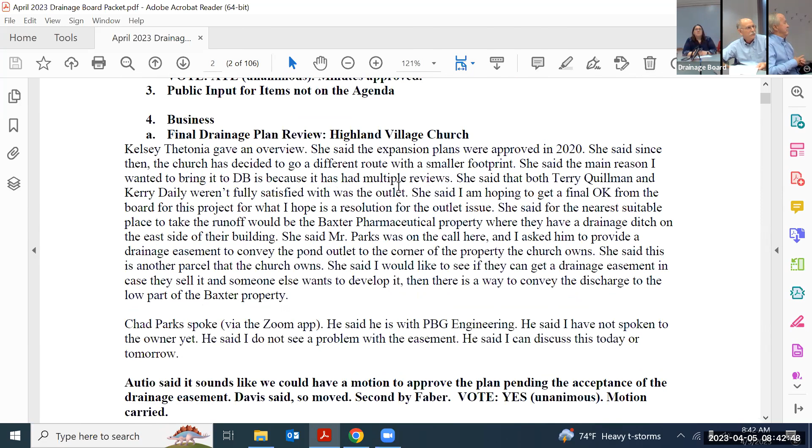Kerry Daily. The one I wasn't fully satisfied with was the outlet, okay, with the outlet maybe. Yep. It's a minor, very, very minor, but I read it a couple times to try. I was just curious if Donna, Ms. Barbara could hear us. If she wants, she could put a reaction of a thumbs up or something on there.

Don, did you catch those? Yes, I am here. Can you hear me? Okay. You came off mute, but we can't hear you. So if you can hear us, you might have your speaker set up, or nothing on our end if we can't hear. I can hear you, Donna. Okay, well, would you mind trying to speak to see if we have our speaker set up? I think the Drainage Board has their speakers on. No, we can't hear you.

They can hear us. So under the Zoom settings, you want to change it. Yeah. Nothing. Got it. Okay, Donna, you're still off of mute. Can we hear you? Yes, I have been able to hear you, but I guess you couldn't hear me. Can you hear me now? Oh, alright. I changed our speakers if someone wants to try talking, see if we can hear you. Maybe just one more time under the mute. There's a bunch of Zoom chats coming in, so you might wanna check for chats. There's two different settings. Okay, so everyone can hear her, but we can't hear her.

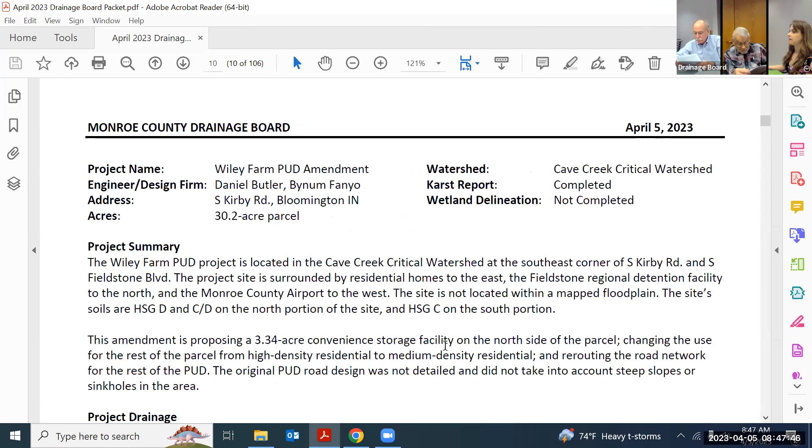All righty, move on to the first order of business, the Wiley Farm PUD. You want to take that over? Yeah, so it's the Wiley Farm PUD project. It's within the Fieldstone area. We have Dan Butler on Zoom representing the project. So this is an existing PUD. As it stands right now, they have the ability to develop this property as high density residential. It's located just south of Fieldstone Boulevard, and a portion of the site drains downstream of the Fieldstone Regional Pond. And the eastern portion would drain through the Fieldstone PUD, Summerfield PUD behind the dam.

So drainage is going to be a big topic for this development. They are coming to us to propose a few different things. The first thing is wanting to reroute the road network through the PUD because the original design was pretty crude. It didn't really take into account the steep slopes, sinkholes, and other environmental factors on the site. So they're going in and trying to design it how it should be to avoid more sensitive areas, calling out non-buildable areas with steep slopes. They performed a karst study and delineated sinkholes on site. So we have all of that outlined now, so they're proposing to redo the road network.

The main thing I'm bringing to you today is what is going to the Plan Commission. They are proposing changing some of the uses on the site. So instead of all high density residential, they want a small portion, about 3.5 acres, to go into commercial for development of self-storage units.

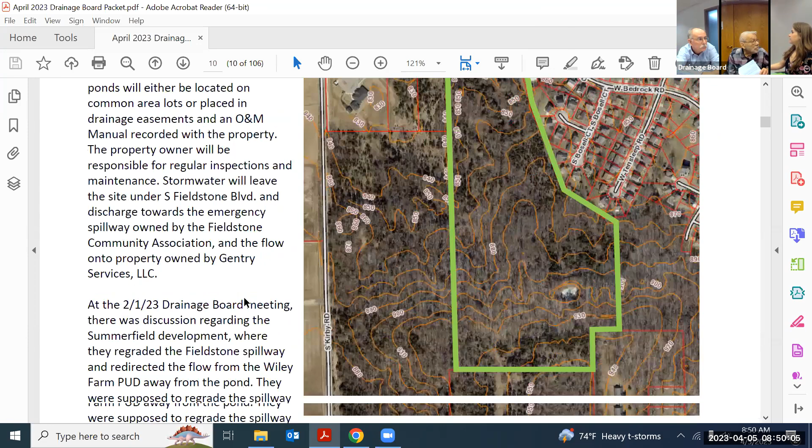So about 65% for the storage units. Let's scroll down to this. And then 40% for the remainder of the site, including the roads, which that 40% is in line with the numbers that Bloomington has for their medium density development. From what I could do on online research, that's pretty standard.

But we have specific concerns about this area, of course, because it is in the Cave Creek watershed. So today, I want to talk about what development of the site is going to look like, what the drainage design requirements are going to be, any concerns we have, and I have a whole list of things.

At this point, do you have any general questions for me, or do you want to hear from Daniel? I would just like to provide some information that since we weren't able to meet due to lack of quorum last month, this continued to move through its process, so it has already gone to a preliminary hearing at the plan commission. So there are some other discussions, but I was pretty outspoken about making sure it came back here to the drainage board, so just wanted to make sure that that was mentioned.

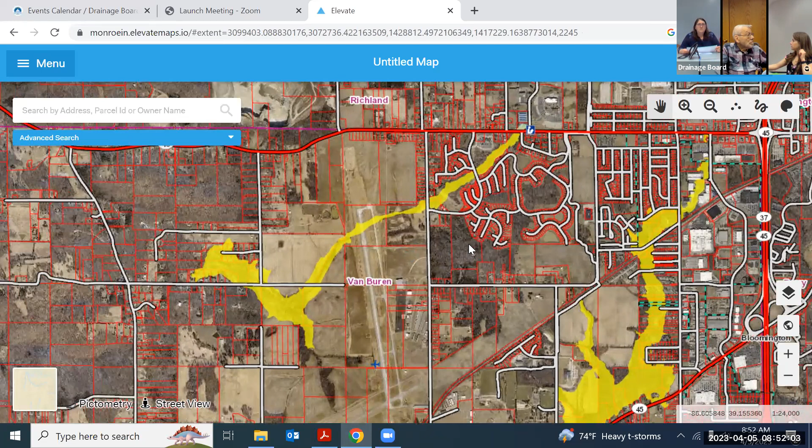It's all wooded right now. Part of it used to be farmland back in the day. So it's grown in. The sinkhole area is mostly to the south here. The drainage goes basically from south to north, so it's draining in this direction. This drains over through here. So that should just give you some more context. And then, of course, the Fieldstone facility is up here.

Leaving it wooded would absorb most of the water. I haven't walked the site to see the quality of vegetation, but it's not very good. I am looking at a requirement to replant trees, anything that they have to remove to put in the detention ponds. I've asked for this before, a 1-to-1 replanting ratio. I'm suggesting 2-to-1 for this one.

No Bradford pears. It would have to follow the planning department's landscaping ordinance for species requirements. There would be room to do that mitigation. We'll find out, and they can be around the ponds, common areas, things like that.

Previously, they were able to fit it in pretty tight there, around the ponds. Yeah, if I could say that, the storage units look like they're not going to impact the karst on site. But downstream, there still would be significant addition to the subsurface flow rate because this is a sinking stream.

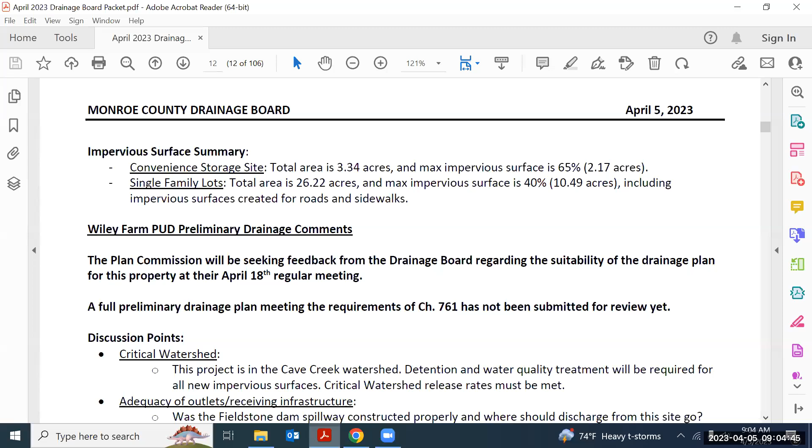We're recommending that with the following conditions: the petitioner is to designate common areas for all drainage easements when the property is subdivided, proposing minimum design standards for each area including minimum lot width and minimum buildable area, and the petitioner is to designate conservation easements around the sinkholes to the south and non-buildable areas.

We are recommending a negative recommendation for adding one use to tract F to the plan commission, based on the petition's incompatibility with the Monroe County Comprehensive Plan. That recommendation for the road configuration and removing part of the buffer yard also has conditions.

The petitioner is to propose an alternative connection to Bedrock that better avoids sinkhole conservancy areas, and to revise the proposed impervious coverage percentage to discount for the roads in the residential areas. Number 3 is subject to drainage board comments. The petitioner is also to propose language regarding the timing and extent of the road network build out in coordination with the timing of the proposed future residential development, and to amend the roadway design to require cul-de-sacs instead of stubs at the end of the roads.

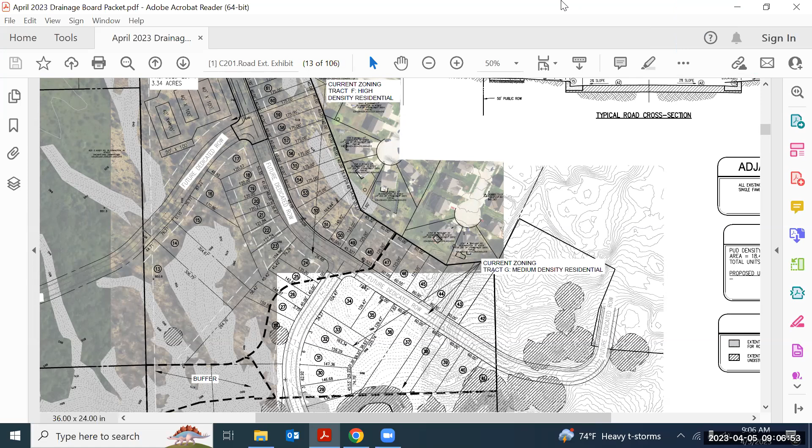Daniel, you said discounting the impervious surface of the roads, or are they accounting for it? Petitioner is to revise the proposed impervious covered percentage to discount the road for the residential areas. So we want them to recalculate it so you already know how much impervious surface the road is going to take up, per lot or for the lots. Just subtracting out the roads, so we see what that number's going to be. Just wanted to make sure we account for it, that's what we're looking for. Right, just wanting more clarity.

Is this supposed to be low income housing? I'm not sure. I don't think that exists. It's not ours. No, all right.

Planning, I didn't see on the plan the plans for stormwater drainage to the pond. Is that going to be along all the roads? Oh, you mean the storm sewer system? Yeah, we haven't received the full plan yet, so we're just talking about whether or not this is going to be feasible and what we want to see with that drainage plan. It's more diagrammatic right now, because they just got - there will be ponds, that's what we have right now.

Daniel Butler, would you like to respond to any of the discussion so far? TSD, could you please unmute Daniel - he's on the attendee side with his hand raised.

I think I might have misspoke earlier when I was talking about impervious and pervious surface regarding Daniel Butler's calculations of how they would increase or decrease - about changing the conditional use and the lot sizes for the residents. So I'm pretty sure I misspoke earlier. I don't think that's a problem right now, to me.

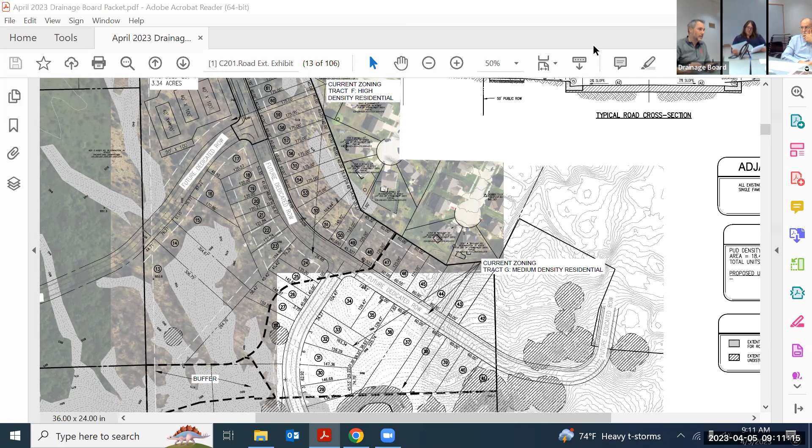But yeah, as I was saying, and your phone, you picked it up - I think I misspoke earlier when I was talking about the impact of the pervious and impervious surface, so when Daniel gets to speak he can clarify that. I've been trying to look for his analysis of the impact but can't find it in the planning packet. I think it might have been in our tables. Maybe I'm thinking of the wrong one. No, you might be right, I'll look at last month's.

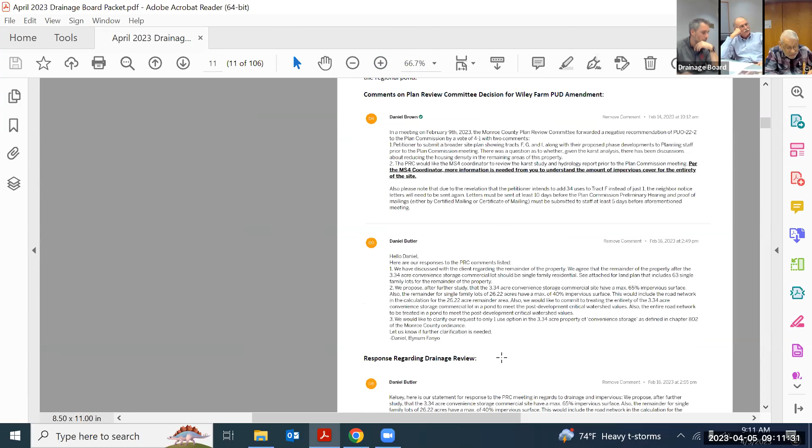All right, this is Daniel Butler here. Hi Daniel, good morning. Yes, this project we had proposed in phases, and we are committing to, as kind of a package for the site, putting together a little piece of commercial at the front end, 3.3 acres of self-storage, and then the remainder of the site we are committing to putting the restriction on us for future phases of doing medium density residential, more or less, with a 40% impervious rate. So we're going to be lowering, committing to lowering impervious for the entirety of the site. We agree that this is a sensitive area that needs to be lowered impervious. On top of that, we're going to be doing multiple pond locations. Even to start, we're going to be doing 2 ponds at the north to meet critical watershed rates, one for the road network and one for the new commercial site. At this time, no residential is proposed with the first phase at least, but feel free to ask any other questions that you would need.

You know, I think it's great you're putting in the additional ponds. This is Bob Audio. And will you be doing any monitoring of the ponds to verify that it is at the rates? Because if it discharges too quickly, then you might be exceeding the rates, even though they're designed properly, just given the karst nature of this area. Well, that and our 4-inch orifice.

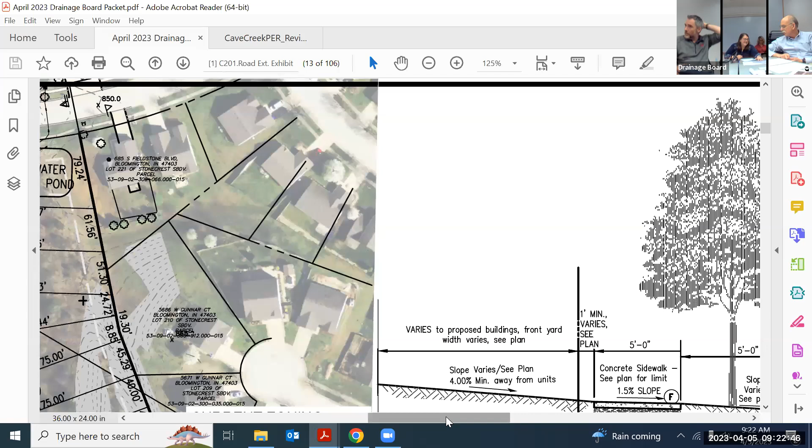But I mean, that's a great question. Yeah, this road dead ends, for the potential to develop this. Good question. And this is draining, I think, it's hard to see the contours, hard to tell, but I think the adjacent parcels. Daniel Butler, the question is if the two proposed ponds are gonna be designed for the additional development, right? On just this parcel. Yeah, no, that's a good question.

We are going to propose more ponds throughout the site. These are not the only 2 ponds. These 2 ponds at the front end on the north end would only be for our phase 1 to make sure we're meeting the critical watershed rates. And then we'd like to come back if need be to drainage board for each phase after that, see how the front end is going, and make sure that we're meeting all the release rates for the rest of the phases.

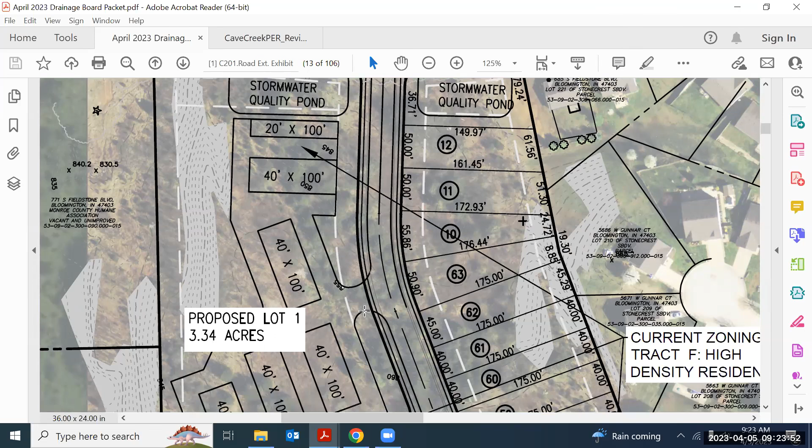But as part of right now, we are going to be committing to that lower impervious area through the entirety of the site. So we wouldn't be asking for anything denser in the future with this current proposal. And maybe I'm just hard of hearing or a little slow today, but just to clarify, you're saying that these 2 stormwater ponds are for just proposed lot 1, the 3.34 acres?

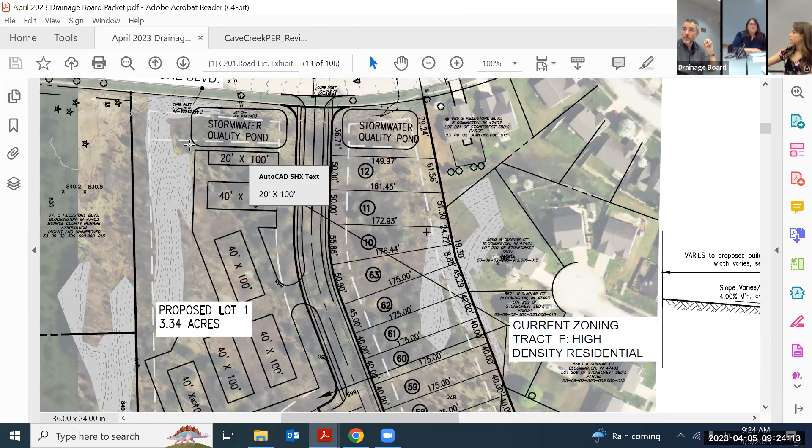That's correct. So we have one on the 3.34 acres, and then we have one to the east of the new road stub, and that would be for the road stub alone. Okay, that's what I thought. Thank you. But nothing for the residential yet.

Well, is that, well, I guess. They're not really saying that they want to have that allowed use for that tract, so. We don't know, they're just wanting to have the allowed use, so the way that they're asking is that could all potentially be storage units, is what I'm understanding, in that one tract. Even the residential across the street, those 40-foot lots, yeah, that's what they're showing.

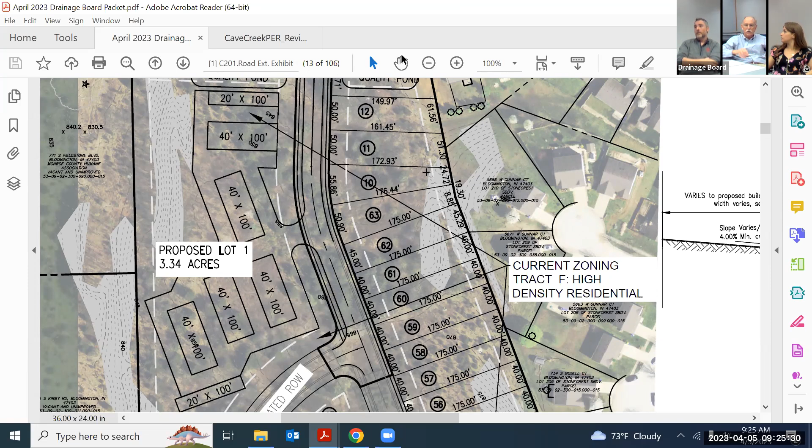But the way that they're proposing is they're just asking to add the conditional use in there. I think that's more of a plan commission kind of thing, but those residential properties might be storage units potentially. I'm not saying that's what they're planning on doing. I'm just saying they're just asking for that one allowed use in that 3.34 acres. I was kind of confused by this discussion a bit too. Okay. Actually, BG is the one that helped me understand a bit more.

Just to clarify, we would only be asking for the 3.34 acres with the storage, and then the remainder of the site, we would commit to no more commercial, only residential. And do you have rough calculations of impervious and pervious surface compared to the storage units and the residential homes? I've been looking for that in the packet. I couldn't find it. We're proposing 65% maximum for 3.34 acres alone, and then the remainder of the site is no more than 40% impervious.

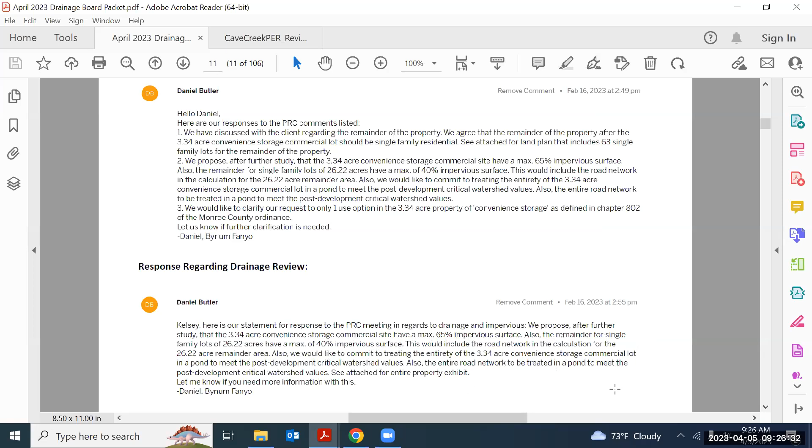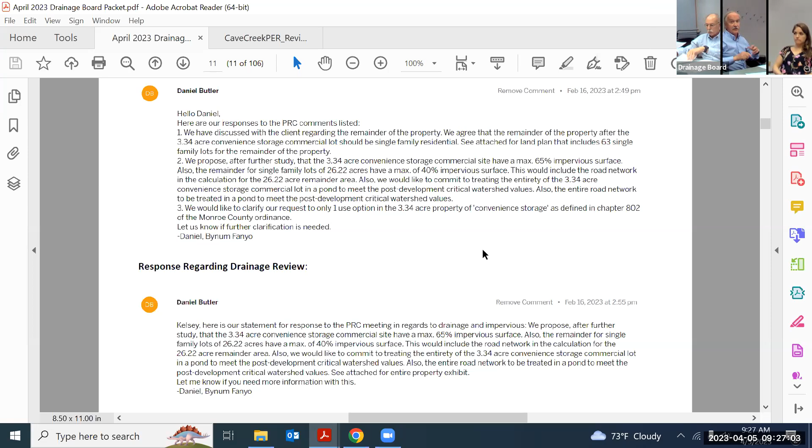So this comment down here. Oh, here it is. And there's a summary of it on the next page. Yeah. Again, what's being requested, any additional requirements, obviously a proper design of detention, but then monitoring during construction to be sure it is functioning as designed.

Yeah, and I would add to it too, that when we do the drainage calculations, we can't just come up with our reduction, and it may be a 2-inch orifice, and just say, okay, you can have a 4-inch. Somehow we're gonna have to come up with a system that brings it down to the required flow rate. Right, so like a treatment train? Well, no, it's more like, if you have a 2-inch discharge and our minimum discharge is a 4-inch, we're gonna have to come up with some other means, a valve, something that we can neck it down to the required orifice size, because it's all due to maintenance. We can't relax our requirements, especially in this particular watershed.

I think it's safe to say I could take the final drainage plan back to drainage board for approval. I've done that with a couple other projects in the Sinking Creek watershed, so that we can look at how it's actually designed and find their solution for the 4-inch orifice issue. Okay. Is that okay? Yeah, I think that'd be great. How fast is this development going to take place? Maybe Daniel has a sense.

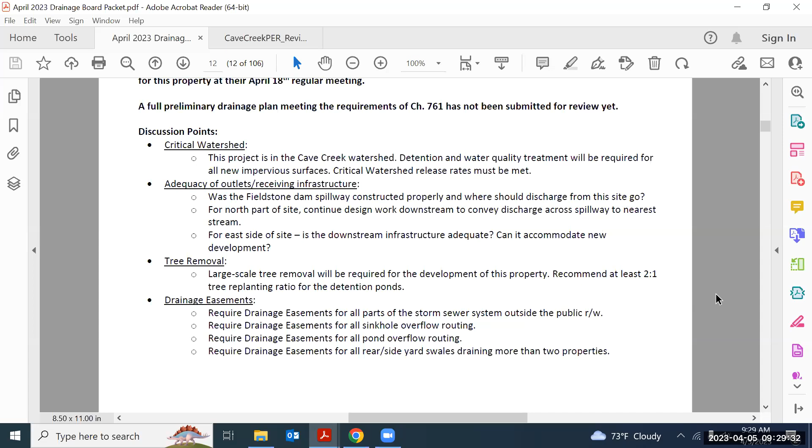That's a great question. Right now, with phase 1, we're hoping to do all of that this year if approved. And then the next phase would be in the next year and a half after that, so probably 2025, somewhere of 25 to 30 homes on the next phase. And then there'd be phase 3 and phase 4. Phase 4 down south is more of an environmentally sensitive area, and that would only be a couple homes. We're not very dense down there because it gets more sensitive with karst features and takes some careful design. Probably the whole property developed by 2027.

Which one's phase 4? Can you put that on there? Yeah, the phasing would be very helpful. So the storage facilities are phase 1, and the residential to the east is phase 2. How many residential lots are there? 63. 63 lots.

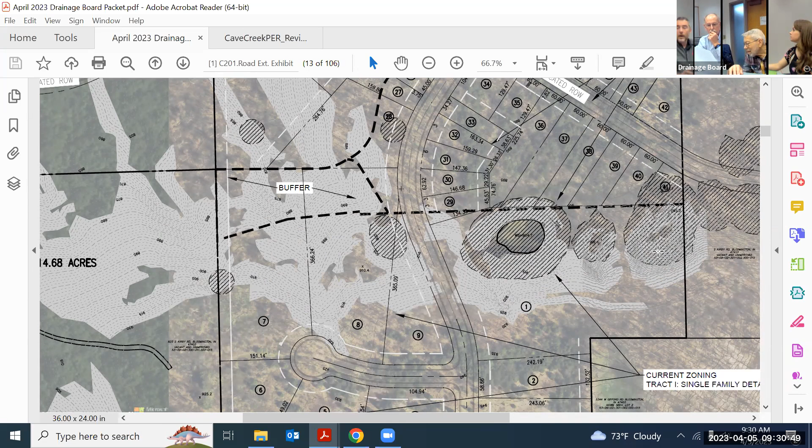Yes, I think so. Hold on, 63. It's weird because the numbering, 63 is the highest number. 10, 11, 12. Yeah, but doesn't it go into the other areas? What are they? Oh, down below here, 1, 2, 3, 4. Yeah, it's 9, so they've got larger lots down below to the south. Yeah, this is the top of the hill, and these are so small. It's steep and carved.

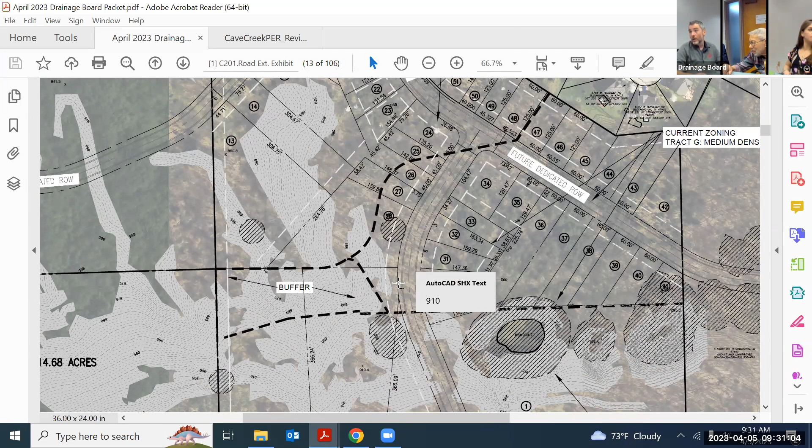I do have an additional question or comment, and it's the public comment about the gentleman that came and spoke about the north end of Fieldstone Boulevard and the dam, and how we discussed how that dam isn't functioning the way it was designed, and I'm very curious if that's something we want to discuss here. It's kind of an off-site situation, but I do think it would be impacted. Yeah, I want to talk about this.

So the person who owns property here, I believe we have them on Zoom as well. They said that this pipe under the road here used to drain back into the pond. And then when Summerfield was developed here, they brought in a lot of fill and basically just filled in all of this. And they diverted this flow away from their work site mid-construction to keep their site dry, so the pipe under Fieldstone would flow downstream of the dam. And they're supposed to put it back, but they didn't. That's what the conversation has been.

Looking at the original dam construction plans, I don't see that it was ever supposed to flow behind the dam. The spill is supposed to be here at 8:30. And there are questions as to, was it actually constructed properly? Is it at the correct elevation? So that's what I'm currently looking at. So where is it designed to go? So was this the emergency spillway for the dam?

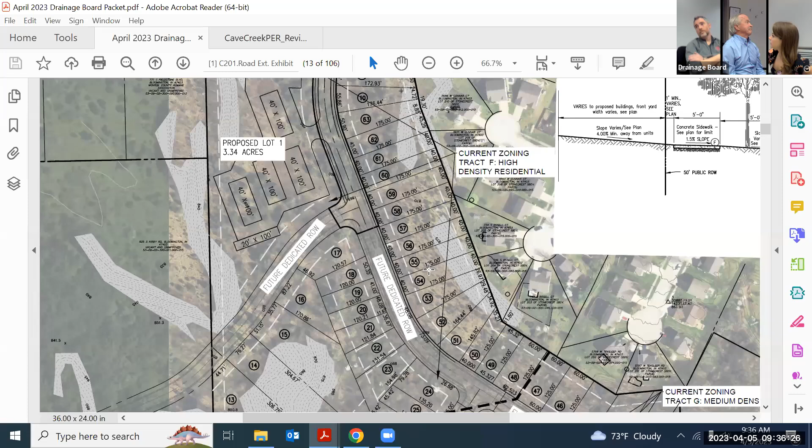But you're absolutely right, and it sounds like a valid concern to have drainage improvements there, north of the property. For the sake of time, let's go back to my discussion points, and then I'd like to move on, if possible, just for everyone's time. So we've gone over a lot of this. Yes. Release rates, pond design, take it back to the drainage board once we have the pond designs that you can approve. The drainage plan.

We'll need to discuss the outlet conveyed over the Fieldstone spillway and what that zone could look like. Tree removal: for detention ponds, how many trees are they actually going to be removing? You don't have that number yet. And then everything will be in drainage easements, basically, and that's just per our ordinance, not a special condition. I just thought it was good to mention, since they don't show individual lots for the ponds, specifically by the commercial storage, so that will need to be under an easement.

The plan commission is looking for us to make a recommendation based on drainage, right, John? So vote. Yeah, that's why it's here, to get your expertise. But probably little that we can make as a compliance measure or a condition of approval, but I think we can make recommendations that could serve as guidance, conditions of approval. Can we? Absolutely. What conditions would we be looking at?

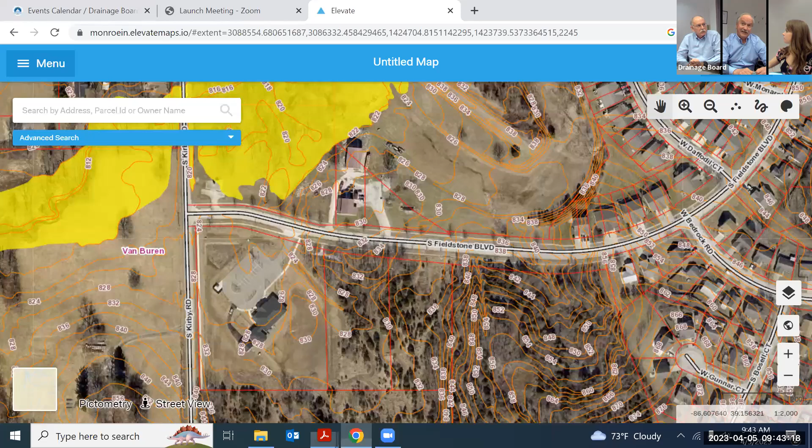And some way of having it addressed. Or just what you're doing is keeping it part of the conversation, which I think is very important. Because if we can't do anything, that's one thing, but to make sure that we make a note of it, is that valuable?

That's on Fieldstone's property, right? Well, then why aren't they maintaining it? That's something I'm going to pursue. I've reached out to them, I just haven't heard back, scheduling a meeting yet.

Is that too much of a rambling conditional approval? That could help us. I hope Donna's getting this. Jackie said she was taking notes. Jackie's taking conditions notes. No, it's too long and rambling.

I can share my screen if you want, or put it in the chat, what my notes have been. Let me do that. Oh gosh, thank you, Jake. I've written down notes as well.

If the ponds don't work, what recourse do we have to have additional ponds made or created? So if they don't work or they're not efficient, they're not sufficient for holding back all the water that's gonna be coming down.

Great question. Wouldn't that be the monitoring? I guess we didn't follow it up, but if the monitoring typically fails, they need to come back. Like, I usually just have the original design to hold them to when I'm enforcing—say, hey, your pond has failed, you need to restore it to its original design. That's the most typical conversation we have.

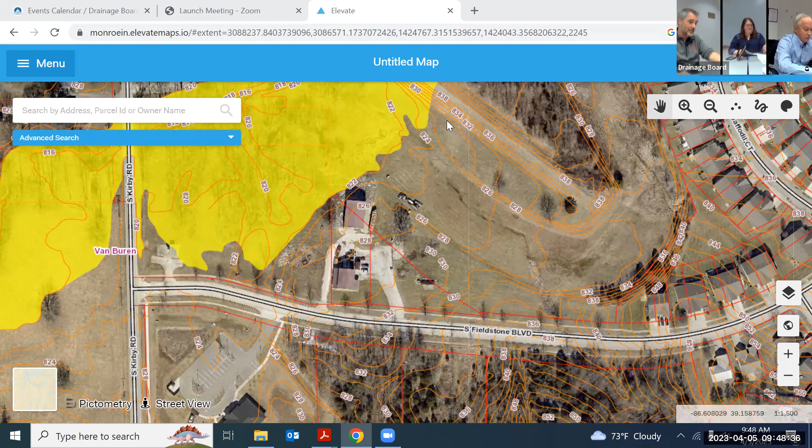Okay, great discussion, great discussion. Got through it. Okay, we have two more things. I'm so sorry, that would be mine.

Well, the K&S, we've been there before, right? So that's an update maybe, or was that next? Yeah, we'll make it next. I don't anticipate these taking as long as the first. That's my second note. And may I bring up one more thing?

What is the status of property buyouts in the Cave Creek? We've talked to our EMA section, and they're currently updating their hazard mitigation plan for the county, and Tammy was on the email. We're gonna try and put those locations in the hazard mitigation plans that will be eligible for funding - so how do we get funds to do it? Ginger has been a big help for us.

Yeah, so I reached out to Homeland Security, who has grant fundings, and I can't even remember the names right off the top of my head, but there's opportunities through FEMA, luckily, funding to do buyouts of communities. There's some stipulations, and the first step is to make sure our EMA in their plans have that these areas are of concern.

So that's step one, and then we have to get landowners on board too, and then apply for the application, then ensure landowners are still on board, and then get the application, then ensure the landowners are still on board.

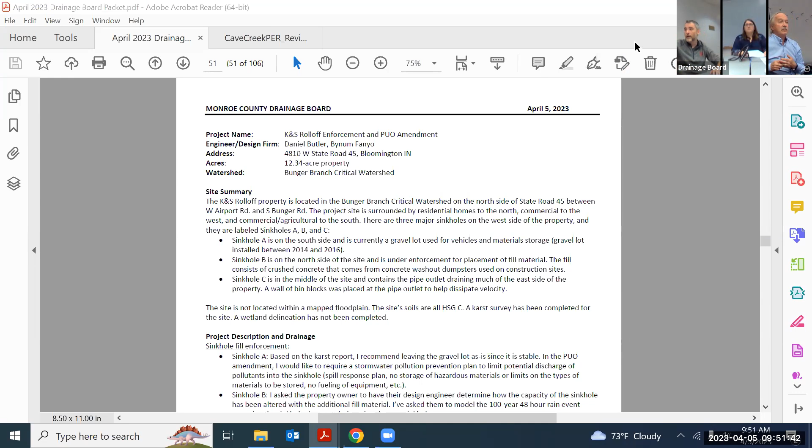I wanted to just say that TSD raised their hand, and I think it's because Gentry Services is the gentleman that spoke last time about the Fieldstone Boulevard issue, and I think they wanted to speak. I don't know if it's necessarily policy for us to go to public comment, but I just wanted to indicate I think that would be fine. Please.

Yes, can you hear me? Yes, good morning. Terry, good morning - Terry Gentry, Monroe County resident, owner of Gentry's LLC. If she could pull up the map of the spillway of the dam again. Thank you.

There we go. My concern all along was I thought it was supposed to go north, but if it's going to go south, and you've already addressed that ditch was not designed to carry water. And you were talking about easement, we would not be in favor of an easement to let it cross our property line. There should be no need for an easement because there is enough property owned by Fieldstone to connect to the creek without needing one from us.

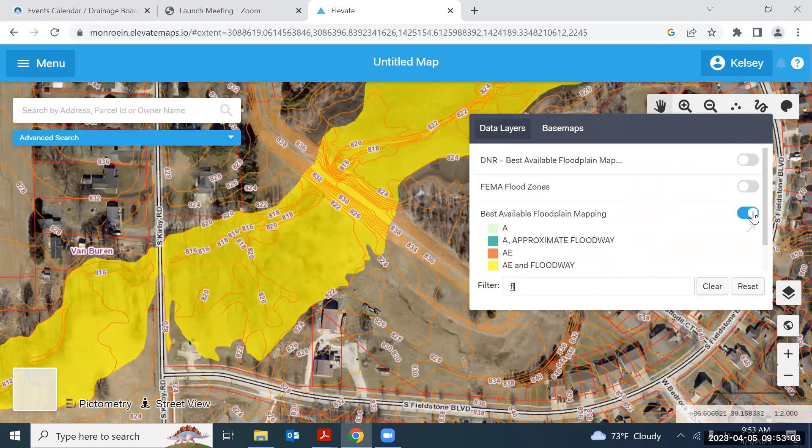Okay, I see. So your property is the two buildings there to the south along the road. Yeah, your GIS lines are off, way off. So basically that 45-degree line that goes over and crosses the creek is probably off too. But there is ample room without crossing your property to connect to the creek.

Based on the contour lines, do you know which one represents your property line best? My property line would be basically where those cars are sitting out there, and go about a 45-degree angle to the creek.

That leaves probably at least a 60-foot wide strip there where they would not have to have an easement. Okay, understood. You might want to reach out to some of the folks with dam safety, because I feel like that stream going through there may cause some problems with the dam itself. You might want to reach out to them to get some information on which way would be approved.

I've been meaning to do that anyway, because we haven't had a DNR inspection in 5 years. And I'm realizing the state legislature changed the requirements for DNR regulated dams, and I think this dam falls just below all of the criteria. It's an 18-foot dam, about 74 acre-feet of storage instead of 100. The only threshold it meets is having a greater than 1 square mile drainage area, so I don't think this is regulated by DNR anymore.

Yeah, but you could still get their opinion. I will, yes, I was planning to actually talk to someone from DNR at the Elms conference about it, to get some idea.

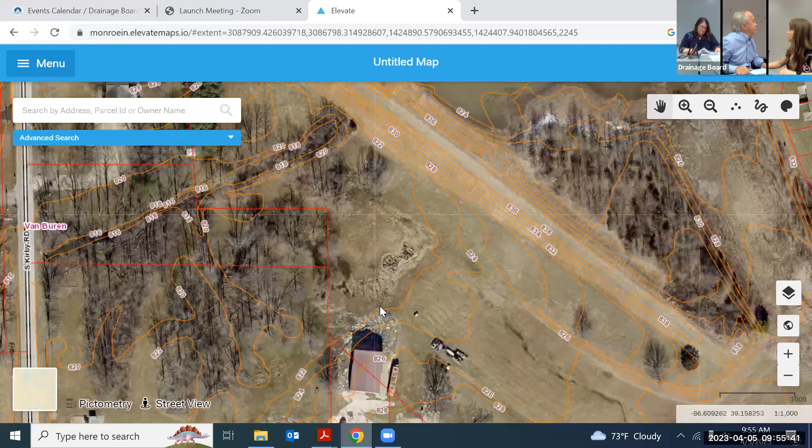Okay, so this next one is KNS roll-off. Daniel Butler is the engineer on this one as well. We also have Bill Williams, who's helping the property owner navigate the permitting requirements for this. This is a property in the Bunker Branch watershed. It's a combination of a compliance case, and they're also going through the plan amendment process for the compliance.

While they do that, they're also trying to add on the development they had planned anyway. We're off of State Road 45 in the Bunker Branch watershed, southeast of the airport. This property is basically in a hole. They have sinkholes on the whole west side of the property.

Previously, they had restrictions on where they could place fill material, somewhere about in this area on that side. They continued dumping hardened concrete, the concrete that comes from the concrete washout containers on construction sites. It's almost all pure concrete. Our local county solid waste agreed it was a de minimis amount of other materials, like the plastic torn off from the hardened concrete. But for the most part, it's just all concrete.

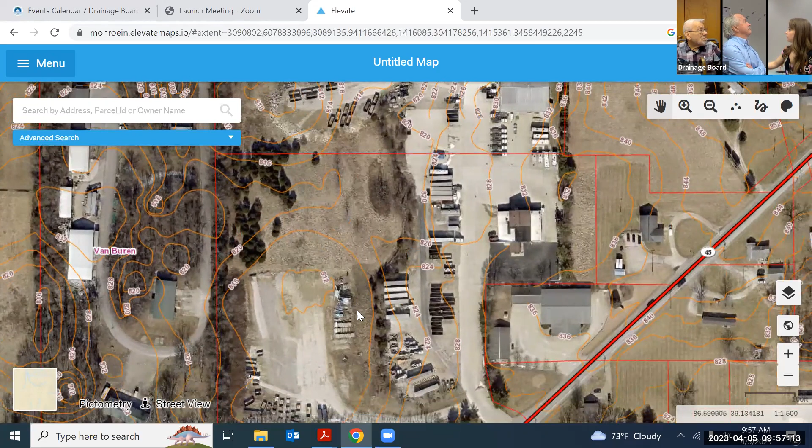They're trying to amend their plan to show that this is now the new limit of dumping. They cannot dump in the sinkhole any longer. While they do that, they've also had some storage in this sinkhole area as a gravel lot. It's flush with the ground surface, so it doesn't appear much fill has actually happened there. Then they're proposing some storage unit development along here. So there are 3 sinkholes total on site: this large one on the north side, the large one on the southwest side, and another closed contour in the middle.

This is where the site mainly drains to, and this is, I think, where their proposed development may drain or—

Previously, someone at the county, possibly Todd, I don't have much record of it, approved; they've got an HDPE pipe that discharges into the sinkhole, but it's protected by a line of bin blocks. The thought is that it would reduce velocity along here, and that's currently what is in place. So for the mitigation side of this, we asked them to get a karst study done to determine the impact of the sinkholes. They said everything appears to be stable and the sinkholes themselves are not open or anything.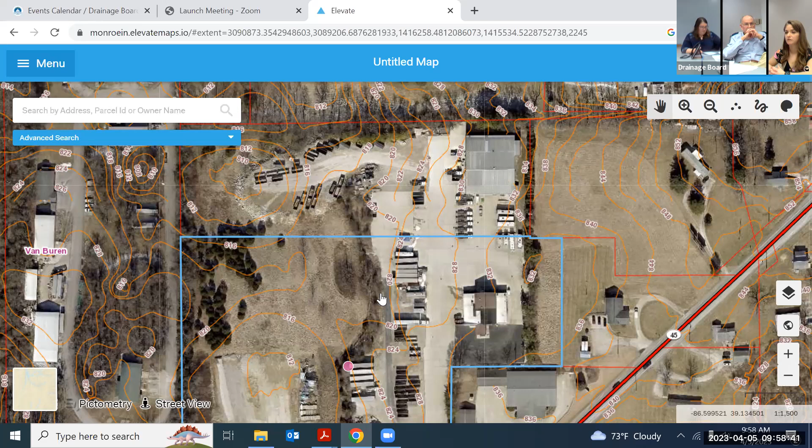So the stance I've taken on this so far is to reduce the amount of disturbance needed. So if you can leave fill in place, leave it. It would cause more disturbance to try and tear it up, getting heavy equipment in the sinkholes. So I prefer to avoid that. Take some more procedural measures for stabilization and other things that they can do on site to reduce any future discharge of pollutants.

I asked Daniel Butler, their engineer, to calculate the high water elevation for this sinkhole to see how its capacity has been impacted, taking that 48-hour 100-year rain event and seeing if it overtops. Basically this is one big compound sinkhole actually. It stays within this closed contour here. If it were to overtop, then I would probably ask for some remediation to help mitigate downstream or offsite impacts.

But yeah, had them calculate that volume based on the new contours, and they got it all to stay within that area. So I'm leaning towards just going towards stabilization, not impacting it any further, and allowing the fill to stay.

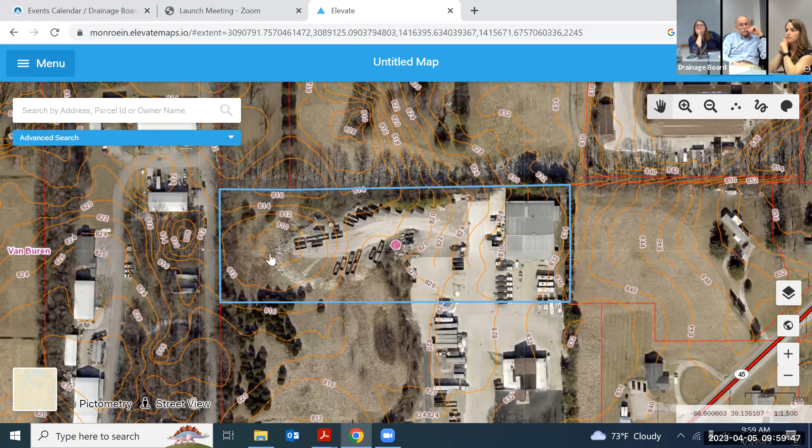For the southern sinkhole, gravel lot, way down area, I'm looking at more procedural measures for that: don't store anything leaking, basically a stormwater pollution prevention plan for that area or any other storage areas to make sure that what they're storing there is not hazardous materials. Procedural things that they can do on the site. Yeah. To make sure this keeps it clean.

That's good. For the development, this is really why I'm taking this to you, to approve design standards for this. It's not in a critical watershed that you previously approved release rates for. So I'm looking to see if you would set a release rate for this new development, and if they can discharge it into the sinkhole or provide detention within a sinkhole. Sure. Which, I mean, part of it tells you kind of what they're doing with that row of bin blocks in the sinkhole. So let me pull up their plans here.

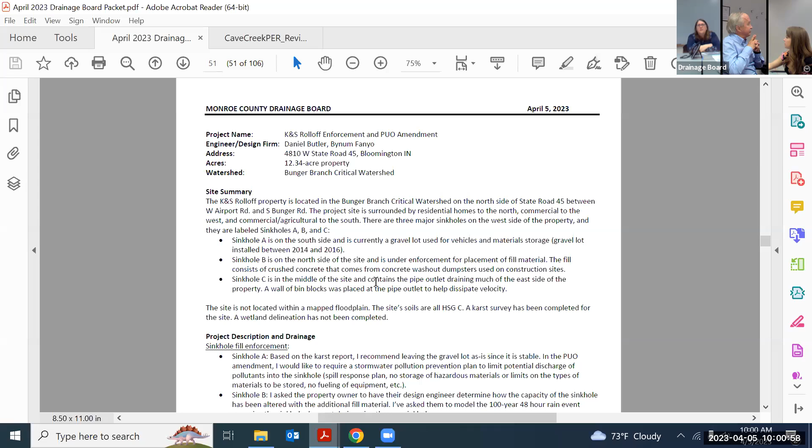Jackie's back. Okay. And what's the use of this property going to be ultimately? The use isn't changing. It's commercial. It's K&S, they store dumpsters. Yeah. And they have on-site fueling, which they have an SPCC for now.

When I type in that address, it doesn't give me that location for some reason. I might have typed it in wrong on the packet.

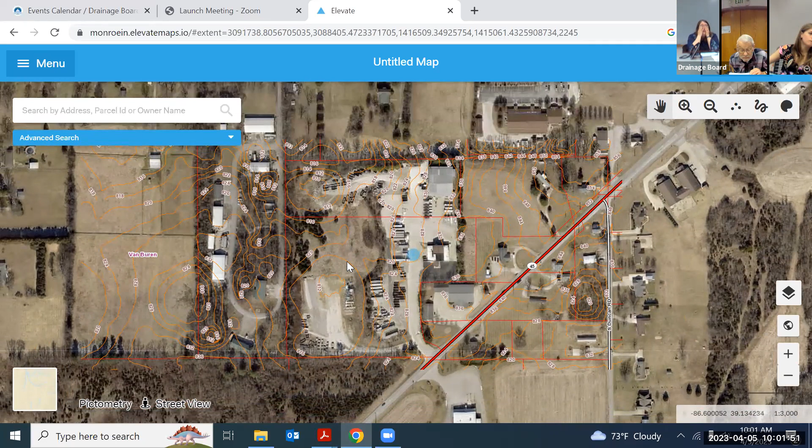Yeah, I kind of cringed at the idea of detention of the dumpsters in a sinkhole. Yes. It just didn't sit right. Understandably, which is why I'm taking it to you. What about some sort of vegetative swale? Some sort of plant uptake type treatments that would also allow for potential storage as treatment was occurring, right? We do bioretention; we have that in our ordinance. Usually the normal requirement would be the detention. Dry basin with native vegetated plantings. So, maintenance.

Oh, sorry, got it here. 4810 West. You do have the correct address, you just have to type it in particularly, like West State Road, W. SR. Okay, so I did find it, great.

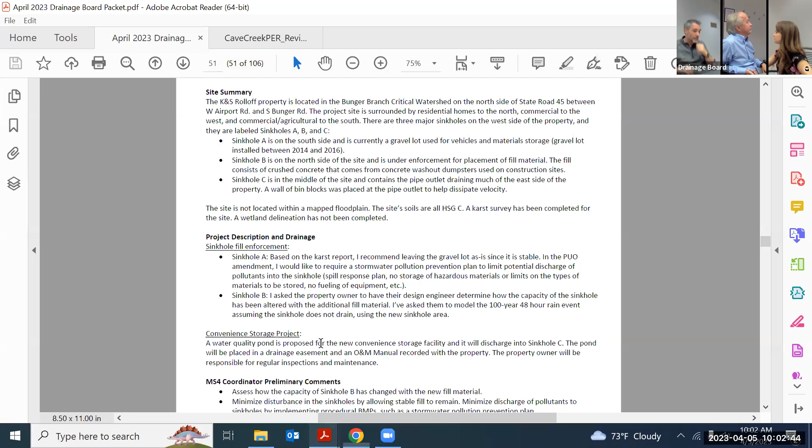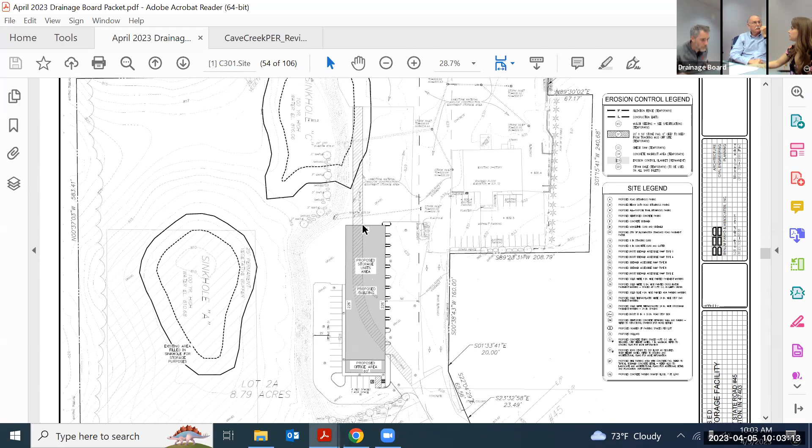Sorry about that. So they're just proposing adding storage units on the site. These are the three sinkholes. So asking them to redelineate them based on the new contours. This is the proposed storage unit, so this area is already kind of a storage area for the company. But they would be adding storage units, no parking, and we'd ask for some type of pond or bioretention area before discharging to a sinkhole, because unfortunately, you can't not discharge to a sinkhole on this property. Yeah. So I think the bioretention sounds like a great idea. Okay, you're not discharging to the sinkhole, right?

I mean, you have to, right? Yeah. There's no external drain, you have to allow it to go to the sink, but with as much treatment as possible, as much retention that is allowed for treatment before it enters. So should we have buffering or something, like actual landscaping buffering, not just a conservancy area? Like some type of plants or something?

Yeah, I would even recommend carbon-based amendments to the soils to enhance the treatment. Okay. Biochar? Well, yeah, but I don't know if you can specifically. Oh, right. But we have specifications for the amended soils in our ordinance, so we could. Yeah, if you can turn the soils into a bioretention type or bioreactor type. So what sort of amendments?

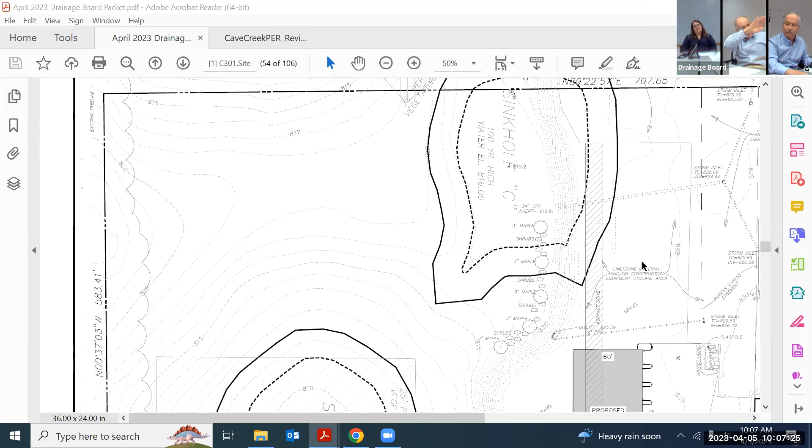And the other thing, where they're putting the storage building, that's all impervious surface right now, right? It's pretty compacted gravel. Yes. It's not gonna change. What about connecting the two sinkholes and getting a little more volume in there? Do we even wanna? My initial gut would be to not change the flow patterns. I think you're right about disturbance. The more disturbance on this property, the more likely you are to create more direct conduits and flow paths. Okay, never mind that. Daniel Butler or Bill Williams, would you like to speak about the current uses of the site?

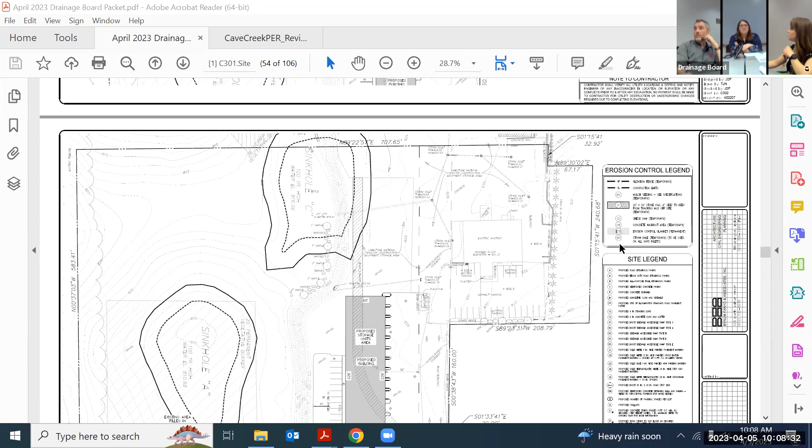I can't hear them either, so I don't know what's going on. I have them unmuted. Daniel's off mute, he may have stepped away for a second. Well, he raised his hand too. Do you want me to do Bill Williams? Bill Williams is also unmuted. Bill Williams. Hello, how's everybody?

Hi. Good. The site currently is being used basically for storage of the dumpsters. They also have been cleaning out dumpsters that have been on construction sites and putting the material there on site. The 4th Street parking garage, for instance, the old one, that's where that's located now. Also the slabs where the county's parking garage was taken. With no rebar, right? I didn't see any rebar on the site. No, all the rebar is being removed as well as any plastic. There's an employee that goes around cleaning all that.

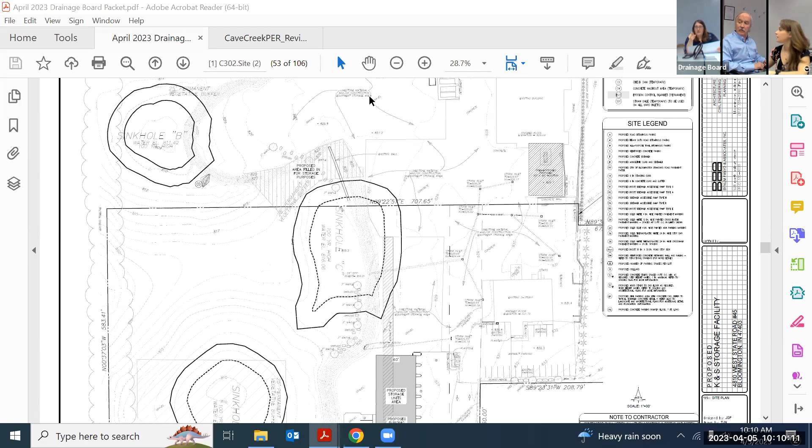Do they wash the dumpsters indoors or at another location? I wish I could answer that. Keith isn't with us unfortunately, and I hate to tell you the wrong thing. For clarity, I'm seeing the plan more close up now. This area just north of sinkhole C, that's proposed area fill for storage purposes. They added that on. Is that what you said we are not allowing? Okay, so that's something else that they recently added on. They're asking to fill in some more.

So, let's see. So they asked if they could basically still add concrete fill to the site as long as it's outside of the sinkholes. So I would treat that as any other fill site or development. I forgot to add that in. I don't think that was there when I created the packet last time, the last board meeting. It's just that bow tie area.

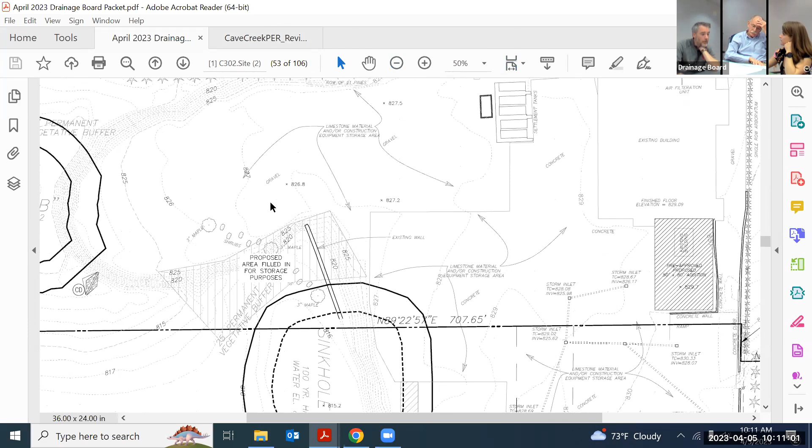I had a question, I guess, about what we're looking at, sinkhole B. The current site kind of has that parking or storage area there. Is the goal to actually get them out of the conservancy area, or are we talking about kind of leaving it as is and trying to address the impacts moving forward? Have we even considered that? They're able just to move out of that old conservancy area where the sinkhole is. I thought this was that we're not disturbing anything, so hence we're leaving it.

Okay, so they're still gonna be storing dumpsters there. I mean, okay. Just storing them, and not cleaning them. I can ask to get that clarified. Yeah, definitely. And what about potential gravel and stuff being pulled downstream during a rain event and going into the sinkhole? Are there any mitigation methods to prevent that from occurring?

We're in the safest room. My husband said it's raining, I said, I don't know, there's no windows.

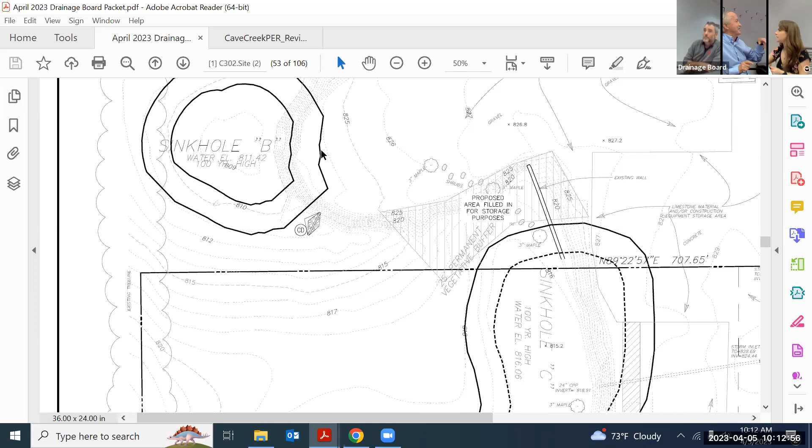I haven't seen any evidence of migration, at least of large gravel. The sinkhole already has gravel at the bottom of it for a lay down area, so you can drive through it. So, okay, past that question regarding this bow tie area. It kind of looks like there's some potentially closed contours there to the southwest. I might personally only give them half of that bow tie, the east portion. I was also thinking that, so they defined this now by the new high water elevation, but I'd be inclined to ask for the largest closed contour.

I see. But if they were to go up on the ridge here, that would be outside of the closed contour. Or this small east side right here possibly, but if it's within the closed contour, then... Or including asking for some type of forebay, or something to capture runoff and dissipate. Yeah, that would be a good idea. But I just wonder if they're hosing down a dumpster, some of that stuff ought to be filtered out before it keeps going.

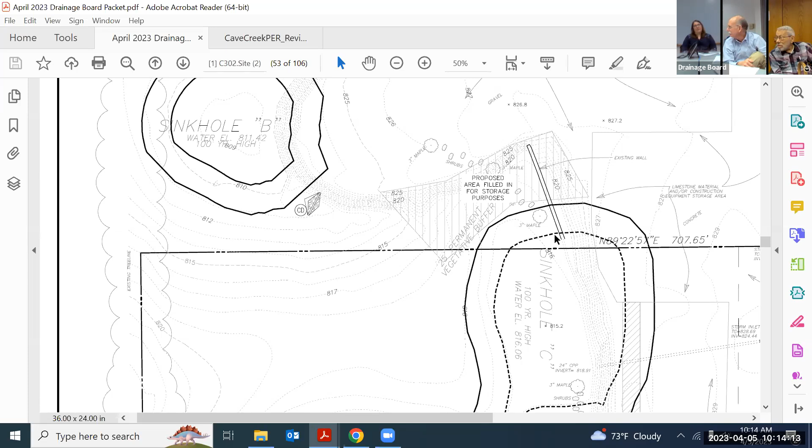Can we require them to do kind of a capture area for the dumpster washout, whether that's going out there or someplace else? Some sort of treatment or containment. I would think they've got some sort of rule for non-stormwater discharge. That may be already going on, because I've not seen any evidence of a slurry or anything along that line. Also Keith says they clean out the catch basins in the existing impervious area. Well, where do they have the water to clean? Like I said, I didn't get that information. It needs to be clarified whether or not they're doing it.

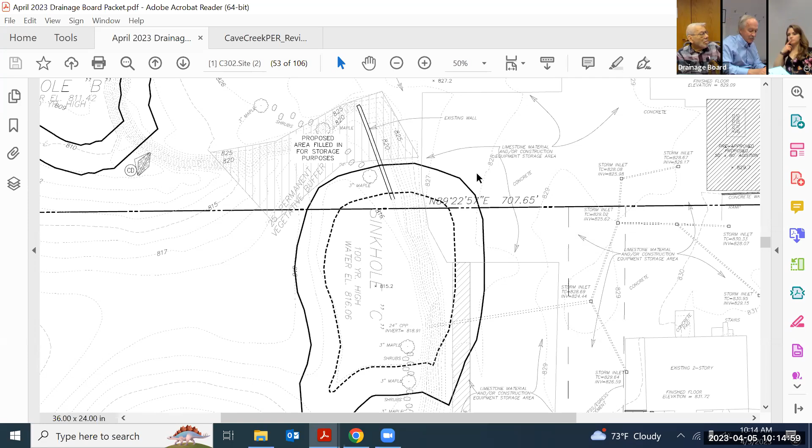So right now I was just looking at design requirements for the storage area. So once again, a condition of approval with bioretention for the drainage from that storage area. Release rates would be pre-post development, or I'd say we should go with the critical watershed, because we haven't defined it as such yet, but I think we're effectively in one of those. Yes, and with the new ordinance I have added this watershed too. In prefacing the new requirements, I think we should have those release rates.

So, Daniel Butler, did you have any comments on the design for this? Before we make a motion, I want to make sure he had a chance. He's on mute. He was just off mute, maybe he muted himself again. I don't think I have any comments. We're okay with your recommendations on soil amendments, pond.

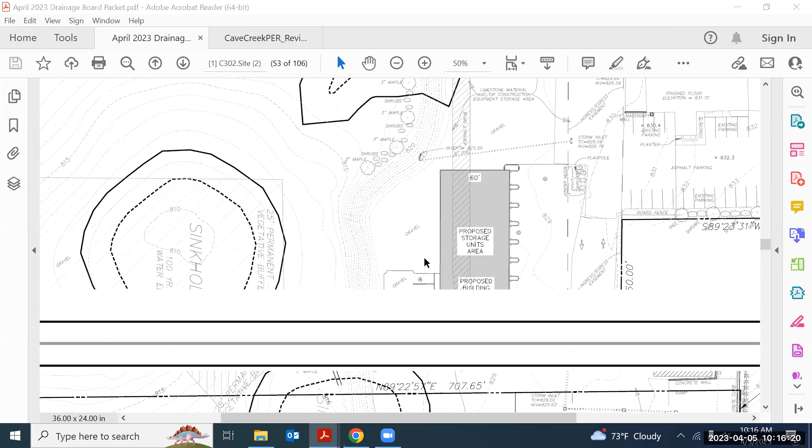We just want to reiterate too that this site was owned by a previous tenant, and this current owner's trying to fix this up or do the right thing in order to make this usable, viable again. Yes. Yeah, Keith has been really great to work with, so we appreciate that very much. Thank you. Yeah, thanks for the comment.

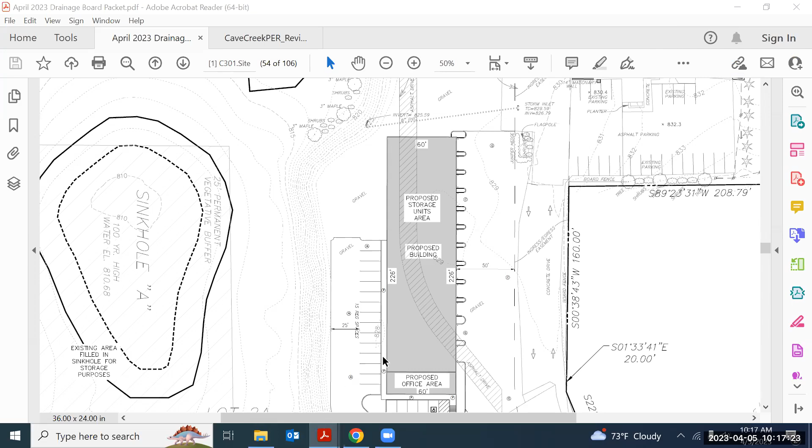I'm kind of curious, Daniel, we were asking about the clean out of the bins, and do you know anything about how that is done? I think we'll follow up if you can't provide any more input, but we've been kind of bouncing that question around a bit here. Or if they even do any cleanup on site. The wish of the owner is to keep the fill on site as is, but we'll take any right above and beyond any recommendations. They're working with IDEM currently to make sure that there's a cleanup on site, but any other recommendations that you'd have, we would accept.

Yeah, the question was about wash water, if they have like an outside washing area that's exposed to stormwater. Or if they're washing the dumpsters, is it occurring indoors or at another location? So. Bill Williams would know that question better than I do. Did he have an answer for that? Bill. He didn't know. Yeah. So I'll follow up with Keith and ask him. And I'm thinking maybe IDEM, but they're regulated. Yeah, that's it. Right, so.

Yeah. Is it coming? Oh, yeah. You feel this one coming? No. Oh. With the radar. Yeah.

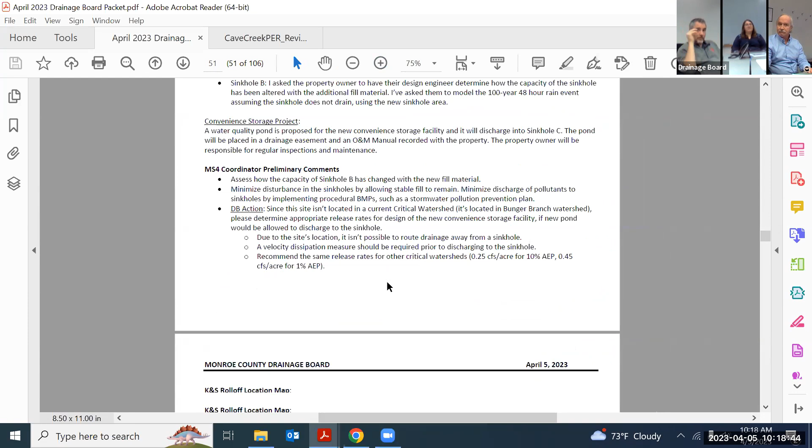So, condition to approve with the bioretention design criteria. Did you want to make a recommendation of looking at certain types of plantings? When it goes outside of here, not necessarily condition, but just encourage. Yeah. Would that be consistent? Yeah, I think so. Okay. And recommendation to look at plants that could uptake metals, or I don't know if we want to go to that extreme. Okay.

I think just amended soils and as much deep rooting type vegetation that doesn't take a lot of maintenance, doesn't put a lot of burden on the landowner to keep that up, but does encourage that. Yeah, we can require plugs in the landscaping. So we can do that. Okay, because some of those metal uptakers are very difficult to maintain if you don't have somebody on staff doing constant work. Gotcha. Nice. We'll do native plantings for sure. Okay.

So moved, right? Okay, Bill moves to approve, and then a second, Ginger? Second. Okay, we'll once again go through the vote. Ginger, aye. Bill, yes. Jim, aye. Aye. Thank you. Give us some clear direction. We have one more after this.

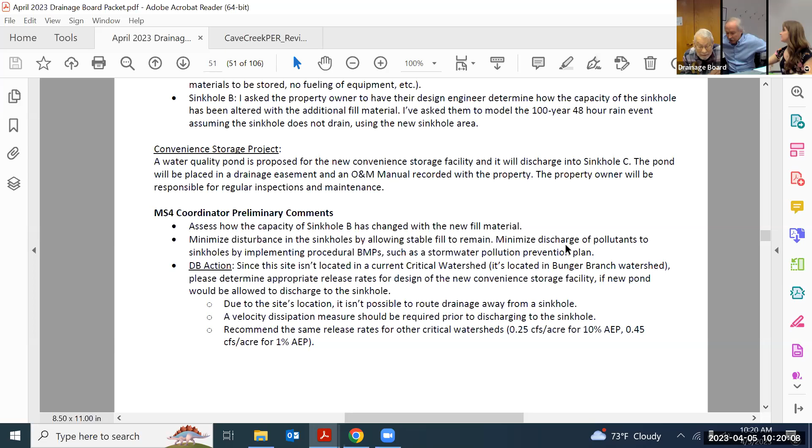I had called, we had a meeting at 10:30, and I just let her know that I was gonna be probably late or maybe not even there. Which is fine. I told her it'd be late. She said, I'm not sure I'm gonna want to stay in my office. It looks so bad. I said, oh, is it really that bad? Oh, this. Yeah. It really is. We're the blue dot right here. So which way is it going? From west to east? Yeah, always.

Yeah, we have property over in Sullivan County, and I haven't had a chance to get out there. And I haven't heard, which makes me worry because I have neighbors that normally would call and say everything's fine, or no. I haven't heard either way, so now I'm really worried. Usually no news is good news. Yeah, but not in this case. Well, 2 people got killed there. There's three now? In Sullivan, there were 3 that were killed, and I think 9 that were injured, and then from Creek, there were the other 2. So I've been chomping at the bit to get out there. Thursday, I have to take a work trip out that direction. Oh, it's coming. It's hitting us good. Yeah, and then at 2, it looks like there's gonna be another pretty bad bout.

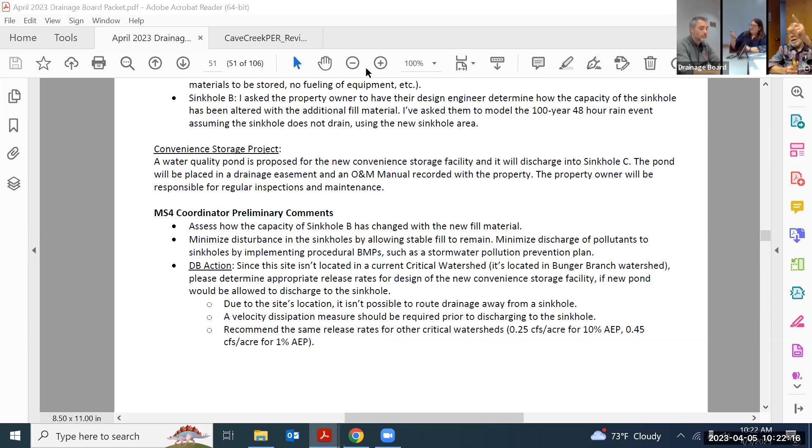Yeah, about noon today, looks like we're gonna get hit. Yeah, these are interesting storms because they've been these cross fronts, right? They're occluded fronts or whatever. Where are they now? Right now they're in Illinois, and we're getting hit with this little, that's future cast right now. Well, my grandson is probably headed west to Spencer and going 231 north to I-74 and I-74 west over to I-39. Yeah, he's gonna be in the middle of it. That's what I'm a little bit afraid of. Yeah, pull under a bridge. Oh, they're driving right now? Yeah, headed back. This is a strong season.

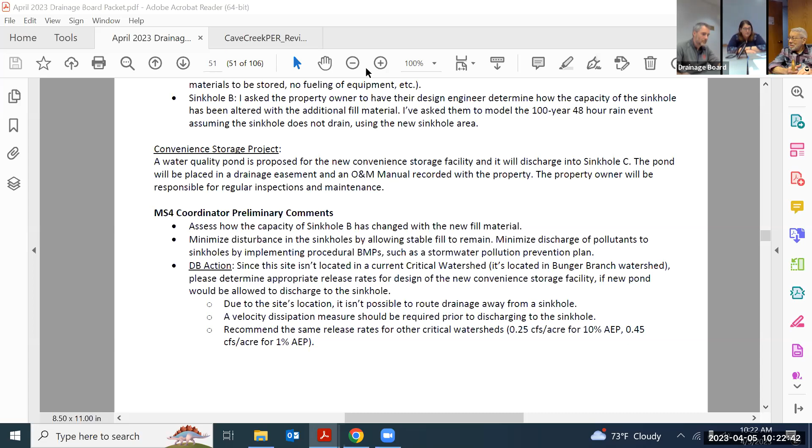It sure is. We were in Denver last week for a conference, and we saw those storms coming, so we ended up leaving early, because my kids were on spring break, so they came up. We left early so we could get ahead of those storms, and the whole time we're driving, I kept looking for the storms, because they predicted it, but we ended up pulling in and had enough time to unload and everything, and then it hit.

And then we had those later ones at 11 or whatever. Yeah. The ones at night I hate. It was scary. You can't see the darn things, you're trying to get some sleep, and you got a tree coming in the window. All right. Appreciate the break, thank you. Reconvene. I'm in.

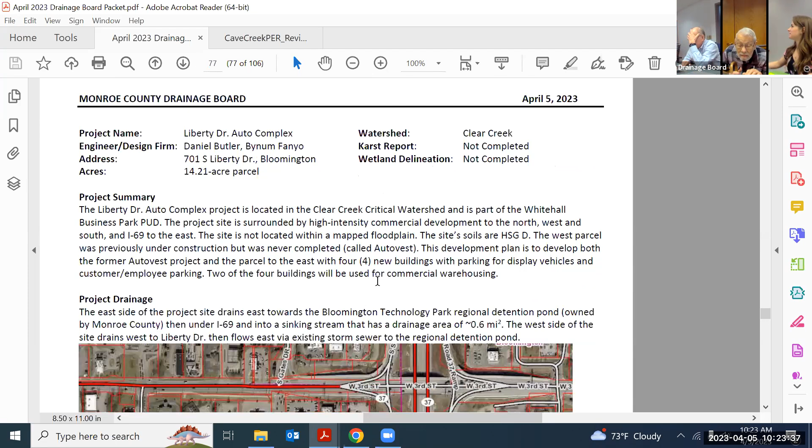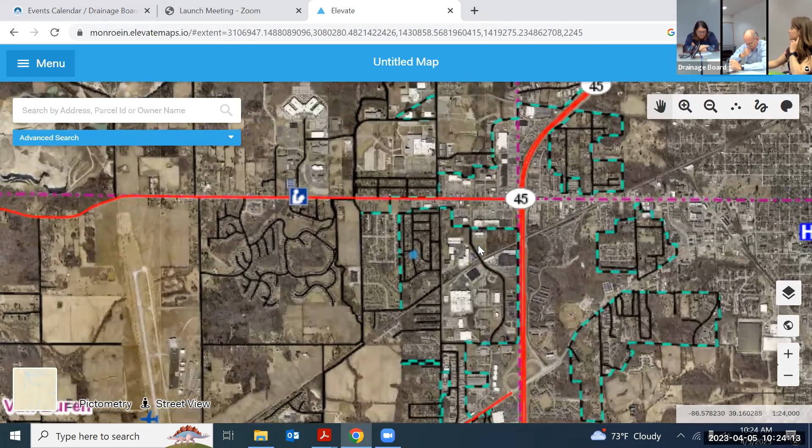Okay, the next one, we have Daniel Butler again on this project. This is a proposed development off of Liberty Drive, on the west side of Bloomington. So it's in this area here. Is that right by Menards? Yeah, it's just north of Menards, their outdoor lumber. So just north of Menards on Liberty Drive, in the county jurisdiction. This parcel was previously getting developed and they stopped. Now they want to combine all of this into a single development, so they redesigned it.

Drainage for this site is all located in the Clear Creek watershed. It drains to the east under I-69 to a sinking stream, basically a big sinkhole that drains about 0.6 square miles, and then it flows under Basswood Drive down into the Twin Lakes area. Pretty interesting flow. The county owns this parcel, which serves as regional detention for Whitehall and Menards. About 90% of the Menards property drains under the railroad into this pond. This parcel does drain towards this pond, but they've decided to have their own ponds on site and separate themselves from the county on regional detention.

The condition of which is, it needs some maintenance. You said there's a pond there? There is, a dry pond. Sorry, almost all ponds in the county are gonna be dry. Yeah, I know. Maybe not today. If you're northern, you're used to that. Like I said, it definitely needs some maintenance, and that's on my list of things to do in the future.

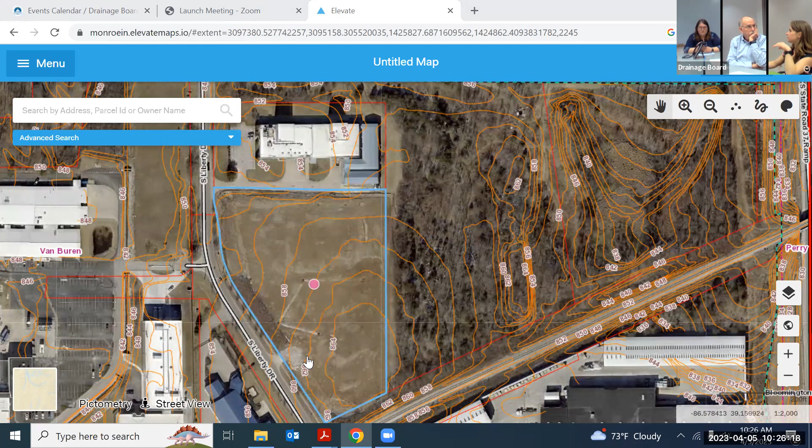So these two parcels here, a few different things are going on. I'm gonna allow planning to speak on this, and Daniel Butler as well. This one actually drains to the west to the storm sewers on Liberty Drive, and those flow to the north and then through an easement back through this property to the regional pond. They're proposing a couple different ponds on site, I think two over here and one on the east side. Where's the two they're proposing? I can see the one pretty clear.

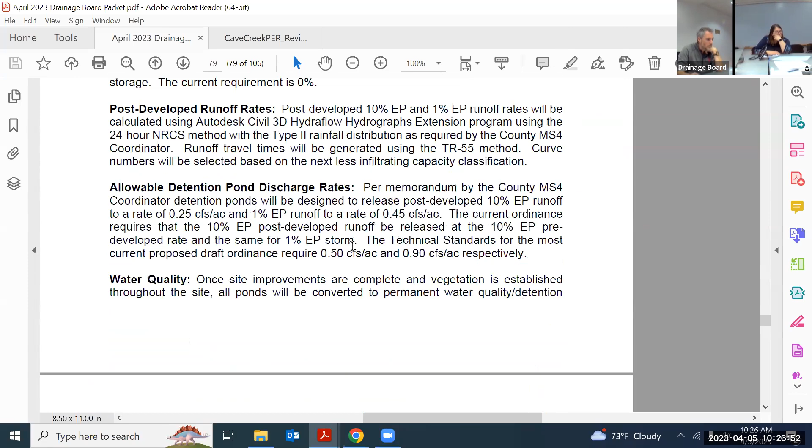Let me pull up the whole drainage report here. I see the one that's southeast. Starting at page 88. Got it, thank you. So these are their drainage basins delineated, very small on the very south corner here. This flows to the west towards Liberty Drive, and then the east basin will drain towards the southeast part of the site.

Okay, you've got it up now. So what is this, a car dealership? It'll be an auto complex. Auto complex? What does that mean? There will be cars. Yes, the planner. You want me to speak? Okay.

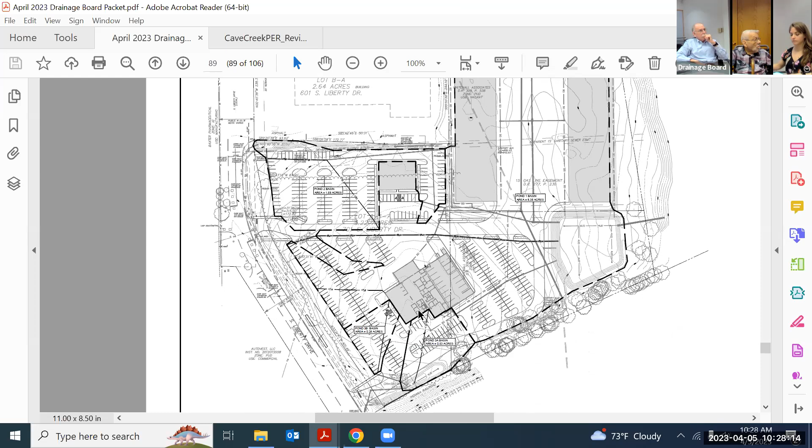On this page, those two long buildings are proposed new buildings that would be storing commercial storage for general contractors. The remaining site with the large parking lot and two other buildings would be for auto sales, which has been previously approved as a development plan. If you drive by there, the site has been substantially graded, and there were some issues with stabilization for a while, but I believe that's been resolved. It's just sitting until this outline plan for the added use is approved.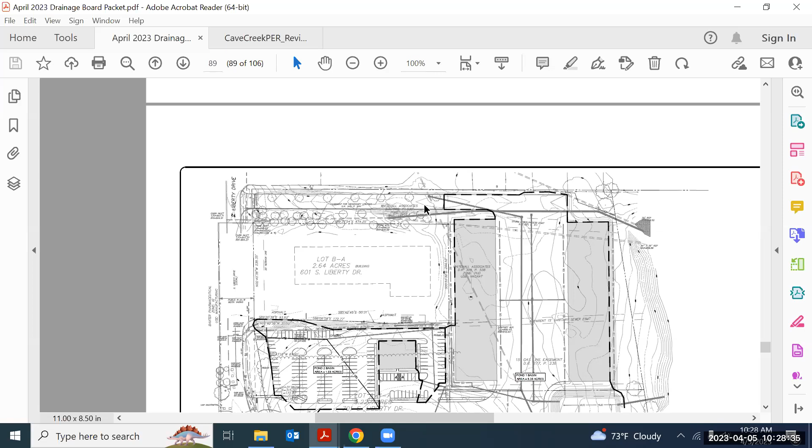Another thing I want to bring to the attention of the Drainage Board: if you scroll up to page 88, it's a little clearer to see. There is a storm sewer access easement, and to the south there's an existing one. Then there's a double dotted line just below that easement where it says DR 357, page 211. So there's an easement, but it doesn't capture an existing pipe.

Their proposal is that they would like to accommodate the two larger buildings. They're working with CBU to see if they could move that pipe, and they want to potentially vacate that easement and move it to the north while still having access to the detention on the east side. To my understanding, the county's only access to that pond would be if it moved to the north, and it would be to a paved driveway.

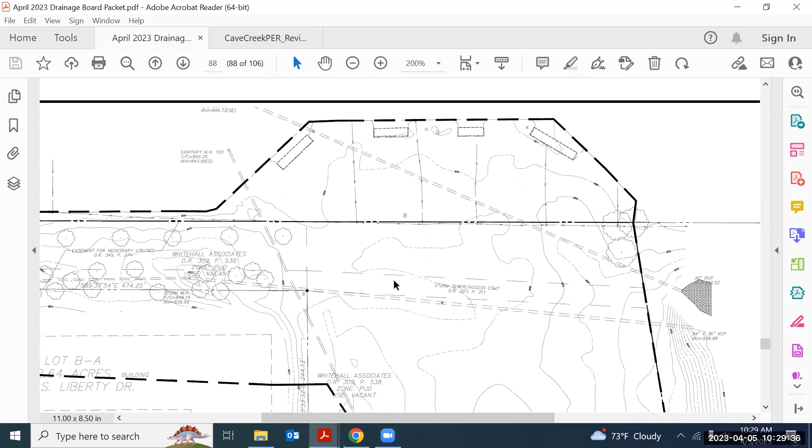It would align with their driveway. Yeah, which would be almost an improvement - we can get to the pond much easier if we develop this. And it looks like they have detention to the south, an additional one.

So all the runoff from this site, they're going to capture in their own ponds, meeting the critical release rate, so they'll be sized appropriately for water quality treatment. Once we do more detailed plan review, I can require additional BMPs on site if it looks like the post-construction land use and potential pollutants would warrant that - permanent filters in the inlets or things like that we can put in to capture oils and stuff.

They cleared that site, one of them. Has it been cleared for years? Yeah, I could never figure out what was going on. Well, it looks like fresh dirt there. Yeah, so it looks like they've done a little bit on there. And I'm seeing it as two parcels - for some reason I always thought this was one parcel, but yeah.

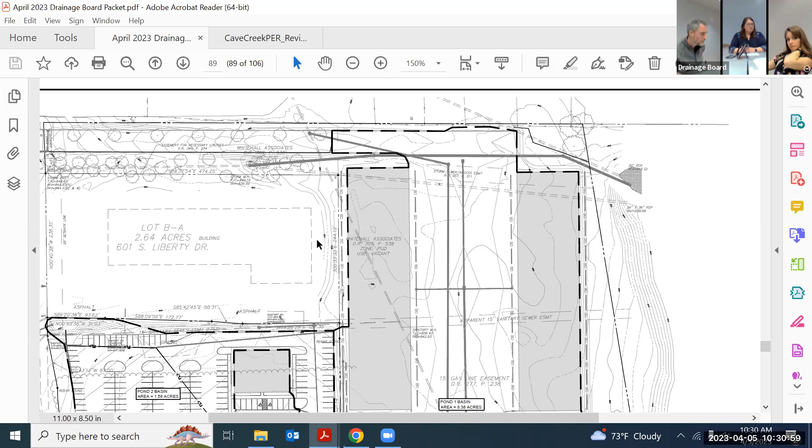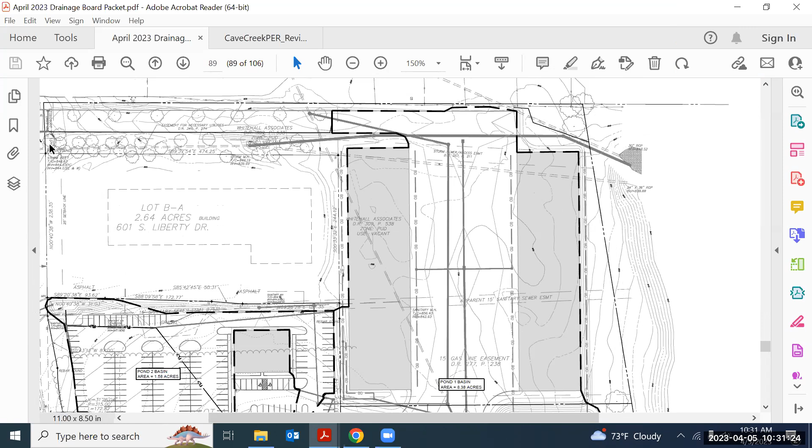It is two parcels, and they'll do an amendment to make sure the long buildings are separate from the auto sales. So those are commercial storage - I'm assuming semis can back into these or large trucks? Maybe not semis. There'll be two access points: to the north on that flagpole lot, and where the mouse is, also coming out on the street. The goal is to not have them do a 3-point turn; they'll be able to loop around. Oh, so there's a drive on the north side that goes back out to Liberty?

So that drainage - are they proposing to put it under the new drive? No, they're going to leave this existing pipe in place; the driveway is up here. They're going to be replacing this section where they have the warehouses - it's proposed like a move. I think Jackie misstated it; they were going to CBU on the sanitary, relocating that, but this is what they're showing for the storm. The relocation is adding a manhole here, and they're just going to be redirecting it around their warehouses to the pond, pushing it north.

36 foot wide easement - that's helpful. My question is, who is responsible for the storm infrastructure through their property?

Typically, even if it's in an easement, if on private property, we would ask the private property owner to maintain it. It is draining Liberty Drive, but it's also capturing the west half of their site through their property to the county pond. Private property owner is responsible for maintenance of this pipe. That's what I'm moving towards.

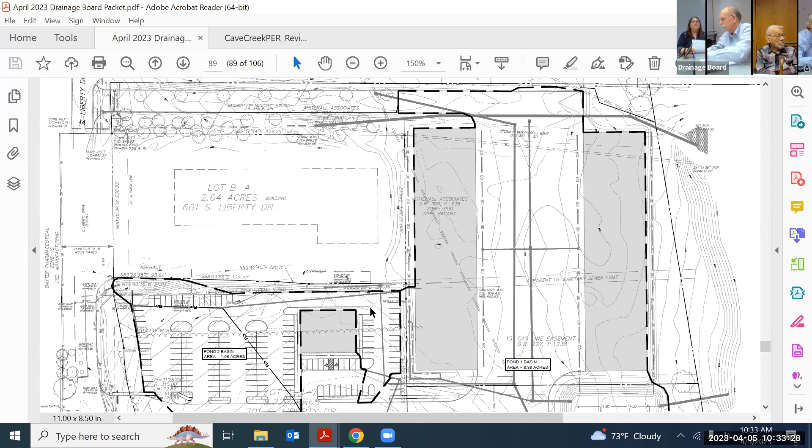This was the last one. I know that. Thank you, everyone. This is Daniel. Thank you, I appreciate it. Well, thanks for coming, Daniel. Thanks for coming, Bill. And I bet planning's heading out too. Thanks for coming, planning. Well, we have one more thing from planning. Oh, we do.

I think I need to have an ordinance work session, honestly, because these meetings are getting long. This one is specific to chapter 825, the eco zone regulations.

Planning department has provided comments in this document specifically for the drainage board. This ordinance was first passed in '96 or '97, and it needs to be updated, which thankfully Jackie and Tammy have spent quite a bit of time looking at and trying to get some common sense revisions.

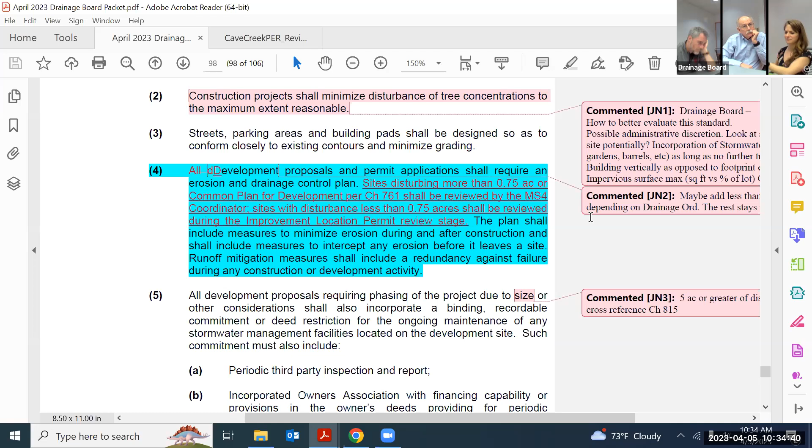Some of the things in this original ordinance have been taken under chapter 761 - for example, construction monitoring, post-construction requirements, just general drainage design, which is going to be a pretty easy fix for us. There's some specific things in here regarding soils and geology.

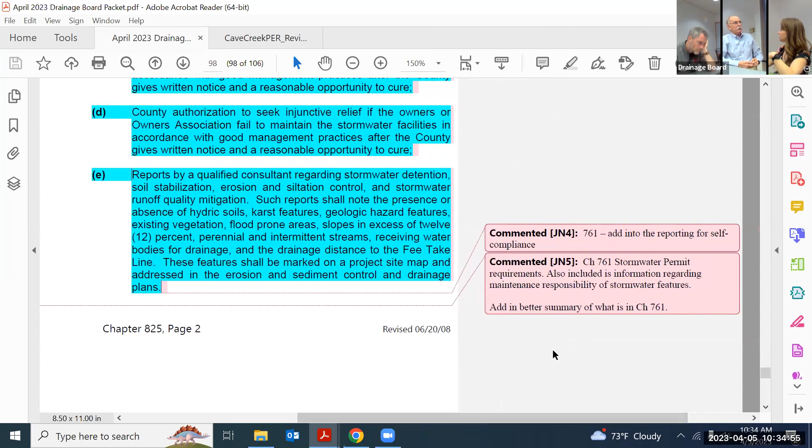I'll turn it over to Jackie to present her specific questions as I try to find the geology questions. Starting on page 100, one thing we would like to know from the drainage board perspective is how we measure riparian areas for no disturbance - currently it's based on the USGS map.

We were wondering if there's a better map to determine riparian areas and possibly do that county-wide - that would be a pretty big change. We're not sure if 100 feet is adequate or whether there could be a standard that shifts depending on the geographic area. So that's question number one: riparian area mapping data we could go off of, and what that protection distance should be.

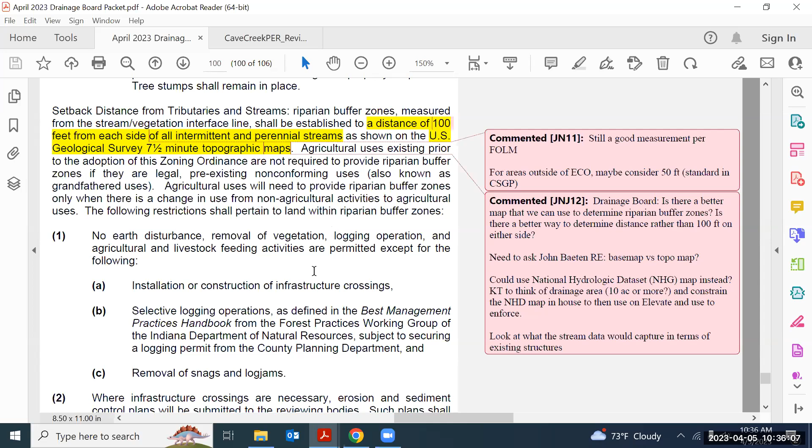A little bit below that, on page 101, we have information about karst - that's pretty straightforward, but we have references in our ordinance regarding soils that we're not able to find exact sources for, to determine what's non-buildable. If there's people with soil background in the group who could help us determine whether it's important to restrict development based on soil types, or whether there's an easy way to visualize and regulate further development on certain soil types - that's one of the questions.

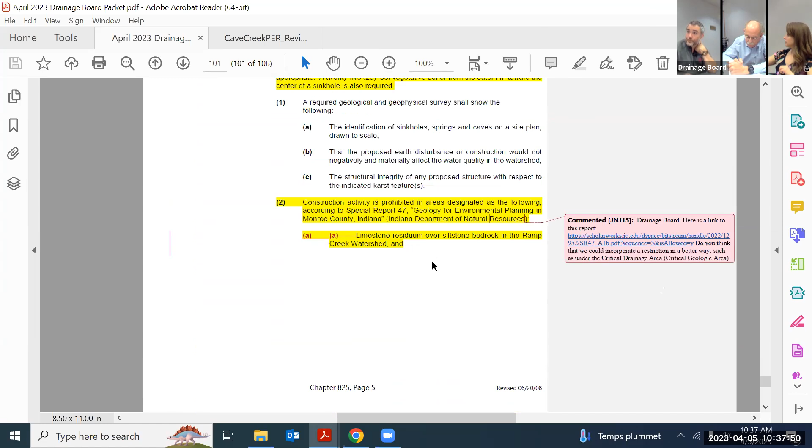Moving down to page 104 - I'm going quickly because I know this has been a long meeting for you guys and we'll probably follow up again. There was old language in our ordinance about a detention basin location waiver, and we're wanting some ideas from you. I think we'd propose removing this from the ordinance and leaving that up to you completely, because we don't really want to be in charge of reviewing adequacy of detention basins in the eco zone - that seems more your jurisdiction.

I think this is referring to some subdivisions where they basically dammed up the headwaters of the ravine, with really steep slopes going down into these retention ponds - I think that's what that's referring to.

Not sure that's great for the health of the headwaters to put a dam in there, but it does take that detention, so that you can develop more of the ridge tops and have the detention downhill in the ravines.

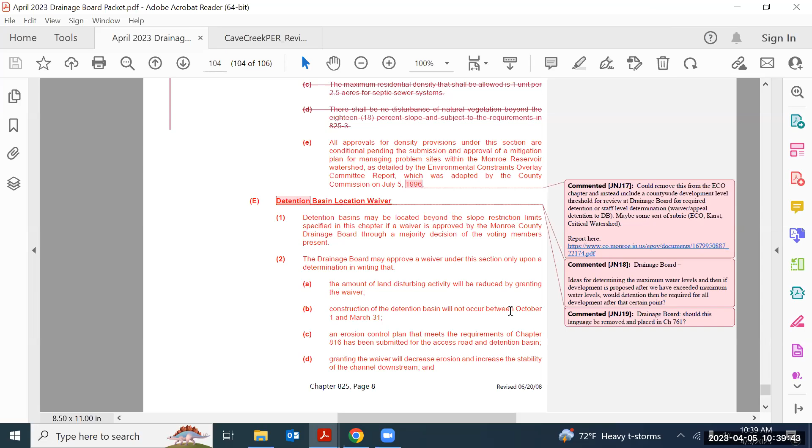That had come up in a meeting here previously, in Lake Monroe. I did ask the Corps of Engineers, and they said they don't have any type of study for how much development the lake's watershed can handle, and they don't seem interested in finding that out. So it's basically up to us as the governing agency, Monroe County, to restrict development in the watershed without knowing what the lake can exactly handle from a flood control capacity standpoint.

How much they're releasing at that time too, right? That study really hasn't been done. How much sediment is getting into the reservoir right now? A lot, I wonder. It's reducing capacity.

I think my main priority is water quality, so sediment capture is definitely a priority. They took down all those trees and that.

I guess I have a question for you, Kelsey, as far as what they're proposing here, what's your thought or take on it?

I think this is something we can manage in chapter 761 specifically. For the riparian buffers and soil restrictions, I think we can dig into the soils database and try to pull out those soil types that we want to restrict, as long as it's easily accessible by the public. I think the main fear is that you shouldn't have to have an engineer to determine where you can put your shed or some things like that.

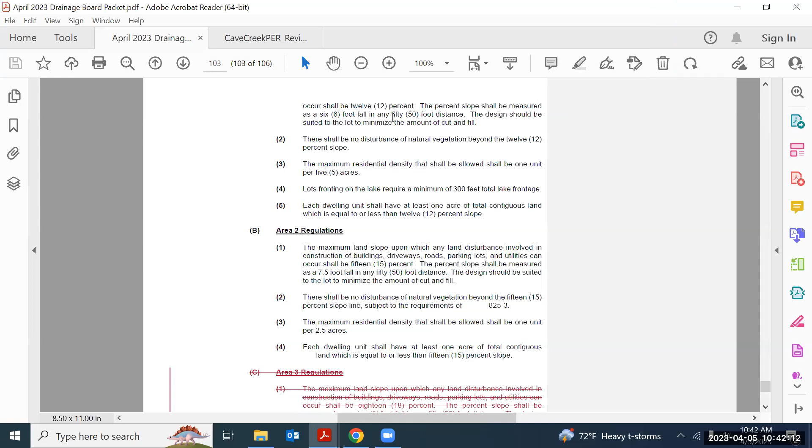I think, Jackie, when we were hoping to have this module presented to the plan commission, we're hoping to get the overlays out in the next very short time period, but there would still be time to review an amendment to this. So I would say by May or June, we'd really be wanting to solidify this.

So I would like comments from you all, if you have them, before our May meeting. If that's doable. Yes, it was on my agenda to get what we'd already talked about.

Just so you know, we are in the works of creating a consolidated map for this area, including the quad. At the end of September, I should have a shapefile that we can share.

I'm not sure, shapefile or a live service. For unconsolidated, sorry, what did you ask? Oh nothing, we'll talk about it later. If it's a shapefile, it's actually a rest service probably. If it's a rest service, then that's great, because that means as it's updated, we're having updated data. Yeah, I'll work on that. I'm still talking behind the scenes, old school GIS, right?

It's just great being able to have that live maintained data. All right, should be good, so I'll get back to you guys. Okay, thank you, thank you.

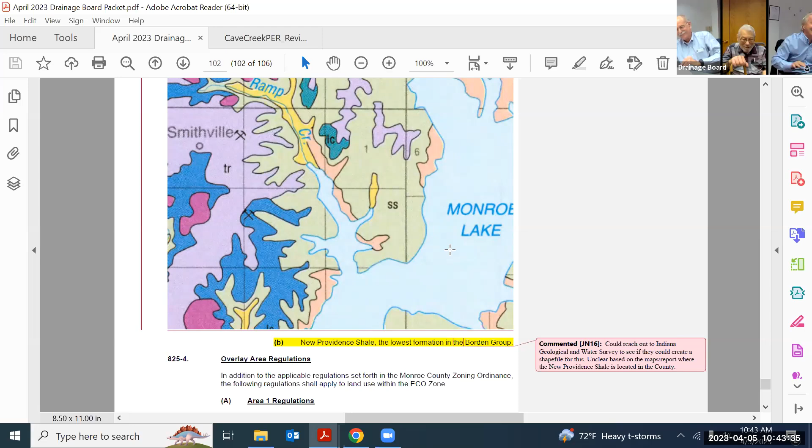I can actually catch the geologist really quick. Could you tell me what the New Providence shale would be, what was specifically called out on this map? It's part of, not part of the West Bay, but part of - was it the Borden formation? I don't know if it's part of that, it's a question for us, we'll look at what formation it belongs to. Are we officially adjourned, right? Yes we are, TSD could shut us down. Okay, yes, thank you, TSD.